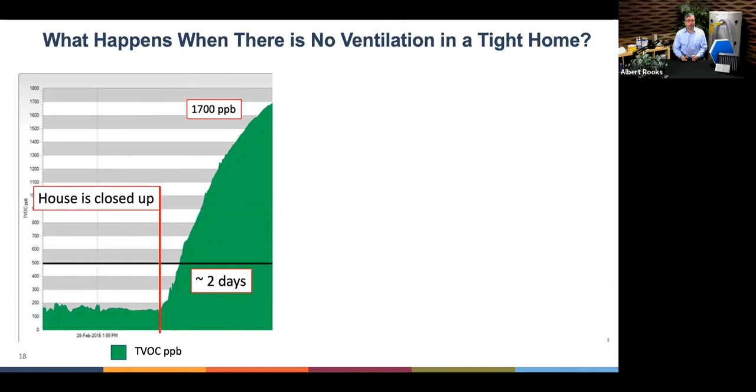When the ventilation system is turned back on, you can see the VOC level immediately drops to well below the WHO recommendations, and remained in a very, very healthy range. That healthy range is determined by the volume of the home and the airflow that we put through it, which we'll talk about a little bit later.

And you can kind of see in this graph, if we did slow that ventilation rate down, we could expect that VOC number to rise back up, right? So this is a way we're directly affecting the air quality inside the home, by the flow rate, especially in a very tight home.

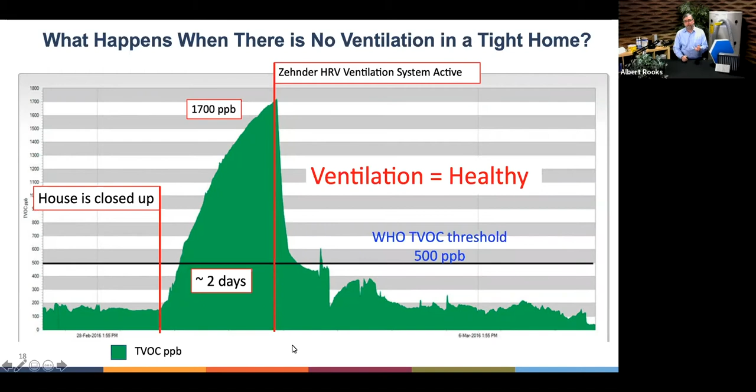So the message here is even when it's built with the most care in material selection, ventilation and a working ventilation system really matters in this case.

Thanks. Okay, good. Catching up with myself there.

So this is really why we like continuous ventilation with distribution. It solves all the problems associated with VOCs and pollutants and gives us the best shot at creating a healthy living space in all conditions for all health statuses, including the young, the aging, and the very sensitive.

Balanced ventilation uses a supply fan and an exhaust fan to flow fresh air across the whole building in one continuous flow. Bedrooms and living rooms receive constant airflow of fresh air. Baths, laundry, mud rooms, kitchens are constantly flowing stale air out of the building.

With steady supply flow flowing in, the air washes from supply points across the transitional zones, like hallways and family rooms, and is pulled into the exhaust rooms and out of the building by the exhaust fan and the negative pressure it creates. The two fans are balanced and constantly running.

The amount of steady airflow will keep the home's relative humidity in the optimal zone. It'll dilute the buildup of VOCs and other contaminants and provide lots and lots of fresh air. It works best with today's newer, tighter homes and can be filtered to manage both normal and extreme conditions, due to smoke that we find in a changing climate.

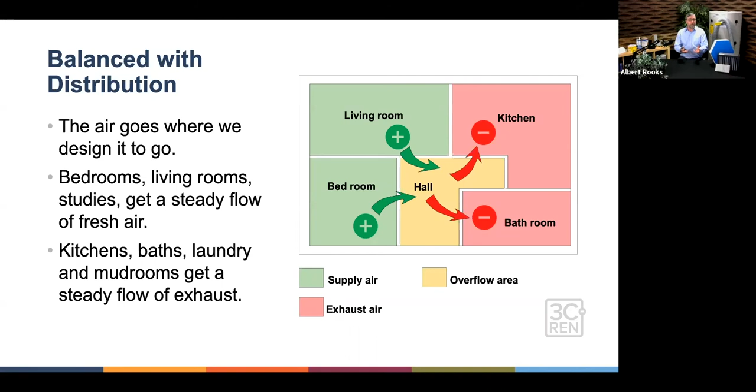How much ventilation do I need? The most basic calculations to provide sufficient airflow for occupants are in this chart. This is a code level chart. It meets safe minimum flow that assumes occupancy based on floor area and bedrooms. This really just serves the code minimum.

There's a lot more that we can do with airflow calculations to improve conditions, as we'll see later in the ventilation for passive house workshop.

In this example, 60 CFM continuous flow works for a 2,400 square foot, 3-bedroom home because you can reasonably expect that home to be occupied by 4 people, with a minimum required supply rate of 15 CFM per person times 4 people equals 60 CFM. So we've got a steady supply flow calculation there.

If the home had 2 baths, the 60 CFM is higher than what we would be required to provide with 2 baths, which is 20 CFM continuous flow per bath, which would equal 40. So we're above that threshold.

If we increase that home to 3 baths, 20 times 3 would bring us back up to the 60 CFM, matching our supply flow. So we're always in a state of balance, but we're choosing really what drives it.

And in some homes, as we get into deeper airflow calculations, maybe in a passive house workshop, we'll find that some homes will be driven by occupancy, 15 CFM per person, or a chart like this, which is really a supply flow calculation.

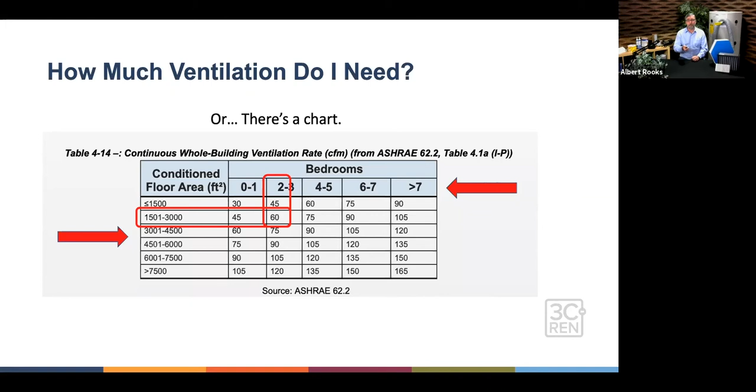Now let's consider the energy impact of continuous ventilation. Continuous ventilation without recovery is like a big hole in the building envelope with a fan taking the conditioned energy we've created and blowing it outside. On a cold day, we add BTUs into the home and then blow those BTUs out continuously with exhaust airflow, while bringing in the same amount of unconditioned fresh air that needs to be heated back up to room temperature.

Once heated, we repeat that cycle, blowing the conditioned air back out of the building. To get an idea of the energy impact, we'll look at a home with a typical envelope of 2x6 walls with R21 insulation, R38 roof, reasonable windows, a HERS insulation inspection with upgraded insulation, and 22 kilowatts of PV on the roof. With code minimum exhaust ventilation, despite all those good attributes, this home was still 2.2 points short of Title 24 compliance at the time we did this calculation.

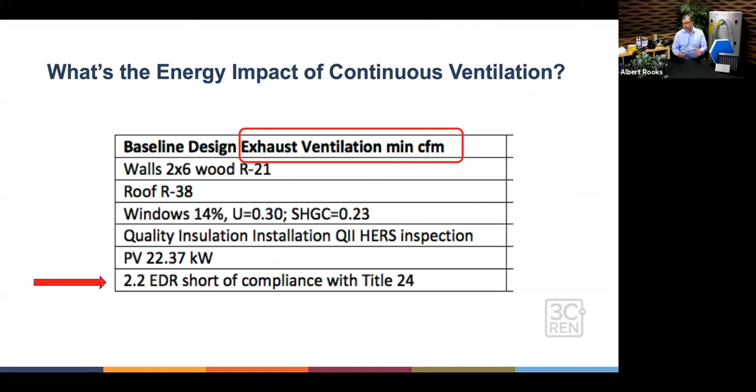This is really down to the ventilation losses of pushing out the conditioned air created in the home. If we fix that problem, the home would be back in certification range. The energy losses through ventilation without recovery are really that big. So what we need to do is recover the heat we're pushing out through the ventilation system. This is where our HRV or ERV comes in.

Recovery ventilators, as we step back and look at them, are an appliance we put in the building, but they're literally part of the building edge or the thermal envelope. Just like the walls, roof, and windows, they provide environmental separation and mitigate heat loss or heat gain. So like most envelope components, the better they are, the better they'll perform. Let's take a look at how they work.

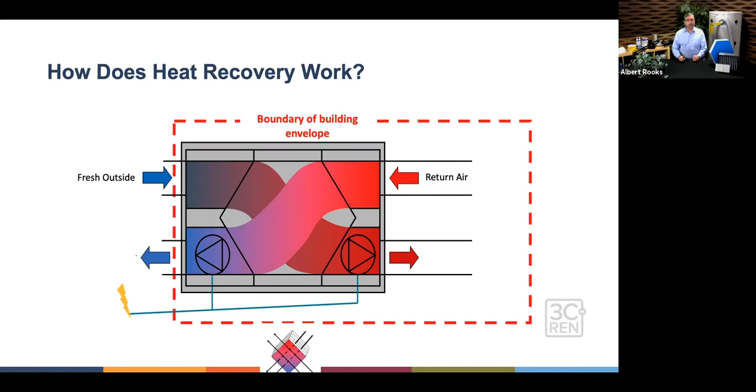Fresh air comes in from outdoors with no heat in a winter heating condition. At the same time, a matching flow of return air comes back from the kitchens and baths carrying heat we've created in the home. The two streams meet in the middle of the device at the heat recovery core, or energy recovery core. As the two systems meet, the return airflow enters this core and drops its heat.

After dropping its heat, the return air heads out of the building through the exhaust. At the same time, the fresh air coming in from outside, which has no heat, enters the core, sees the heat the return air dropped, and picks it up, because nature is always seeking to balance itself. A flow with no energy meets one with energy present, and with lots of surface area in the core, the energy starts moving to the side with no energy. That energy is picked up and carried into the home through the supply air duct.

So the better we can manage that transaction, the more energy we retain inside the home. The return air drops its heat at the core, and this works the same way in a winter condition as it would in a summer condition.

In a summer condition, it's hot outside, and we're hoping to keep the home cool at a certain set point, whether we're applying air conditioning or not—it doesn't really matter, you've got two different conditions. Warm air coming in from outside is countered by the cooler flow coming back from the kitchens and baths. That temperature differential meets in the core, and nature seeks to balance itself: the high energy on the flow coming in from outdoors drops at the core, and the stream without energy picks it up and sends it back outside. So the heat on the outside of the building in a cooling climate comes in, gets dropped, and then gets pulled back out.

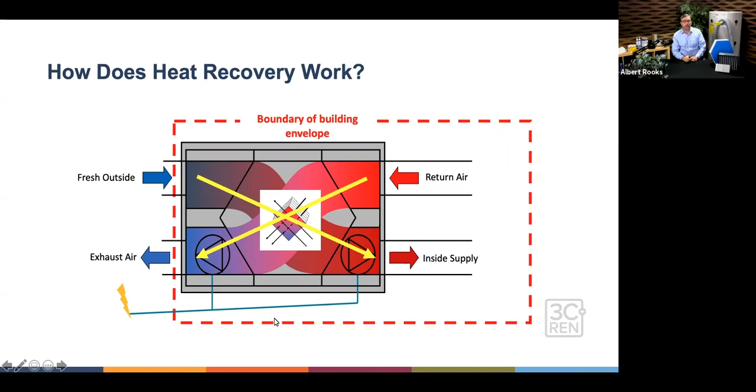So as we work through this... okay, they've calmed down. Thanks. Let's take a closer look at really kind of how this works.

The recovery core, also known as the air-to-air heat exchanger, is where the two air streams, fresh air intake and leaving exhaust air, pass by each other with a large amount of surface area and in contact. So large surface area, airflow is in contact, but they never mix. One stream goes one direction in one compartment, the other stream's going in another direction in another compartment.

This is what one looks like. So this is a flow of air coming in, and all these plates are separated from this flow of air kind of coming back out. So it's similar in shape: flow, outward flow, flow, outward flow. The two streams never touch, but they have this large surface area to kind of be in proximity.

And as they're in proximity, the side that has energy drops that energy to the side that doesn't have energy. Simply how it works. So as that transaction happens, either in a heating climate or a cooling climate, that process continues.

In an ERV, the humidity moves in the same principle. So in homes that have a low relative humidity and we want to conserve whatever moisture that we're creating, which we're going to take a look at in a whole chapter, there's another style core that will do that same transfer. It'll transfer the heat energy as well as the relative humidity, moisture, whatever we want to call it - or we'll call it enthalpy - and it'll bring it across the core and send it back.

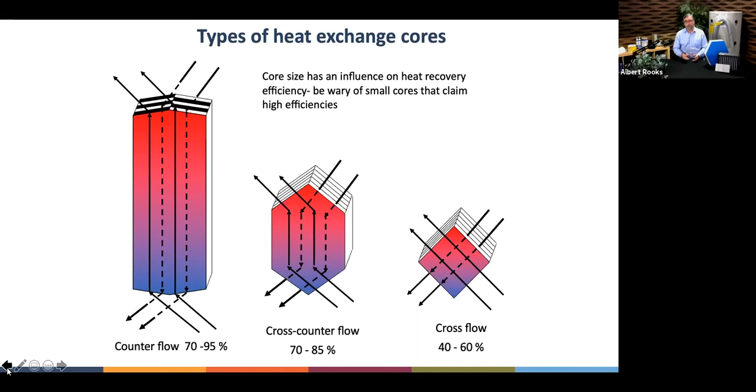As we change our focus, then we start looking at these kind of higher effective rates, 70 to 85 and even up to 95%. And this could be in a single family home or a full on commercial building, residential apartment building, schools - all these applications that use ventilation.

So let's take a look at a home that's got a relatively good HRV in it and really kind of how that works. So this is a brand new home built in 2014. It's in the Pacific Northwest, Vancouver, Washington. That's a mild climate. This data was collected by Portland State University through some research projects to kind of gather information on high performance buildings.

So this is in April when the home is occupied, but they have not turned on the heating system yet. So this is simply all down to solar gains, occupant using energy, people, refrigerators, things like that, and an HRV in this case.

with roughly 90% recovery. The home, the ventilation rate for the home is 0.3 air changes per hour, which equates to the volume of the air inside the home turned over once every 3 hours, all new, right? So every 3 hours, we've blown out the entire volume of air inside.

And really, what we're trying to do is retain all the energy that we've created inside and that we're generating inside. So we're going to take a walk through the data now, and I'm going to kind of tell you about what these lines are on the graph.

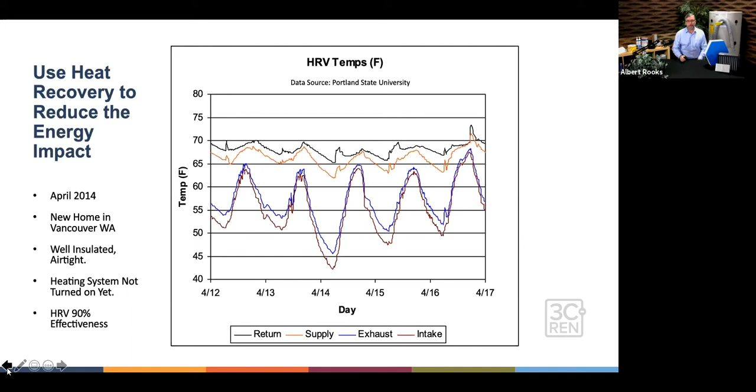We are going to get to questions at the end of the chapter, and we're really close, a couple of slides away, and then we'll spend a few minutes kind of talking it through.

So same example that we looked at before, in terms of this Title 24 calculation. On the left-hand side, we're back to that same house, and it's exhaust only, no recovery, right? Just a hole in the wall. We shove the energy out of the building with a fan. We've got our usual 2x6, R21, R38 roof, yada yada yada.

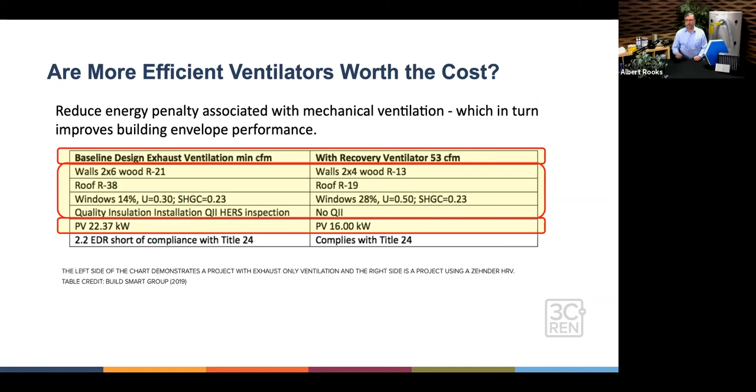Compare that to the home on the right. Now it's 53 CFM, so it's not a really big home, right? It's going to be less than 2,400 square feet. And now we downgrade the building envelope. Instead of 2x6 at R21, it's going to be 2x4 with R13. The roof goes from R38 down to R19. Windows don't really work quite as well, a little lower performing. There's no HERS inspection on the install. And the PV goes from 22 kilowatts down to 16 kilowatts.

So the whole thing is down. But the thing is, because we're employing heat recovery on the ventilation losses, big old hole in the wall, that energy, using that with this lesser performing building envelope, would put us into Title 24 compliance. Not at all saying that's what we should do, use HRV so we could use 2x4s and R13. Not the message here at all.

It's an illustration. This is a calculation that we did with a consultant in California as the new Title 24 is coming out. We looked at single family homes in many different configurations and apartment buildings, and tried to understand what the ventilation losses are, and as you increase the scale of effective recovery, what that does to the building envelope, and what other alternatives it can help you with. If anybody is interested in that, reach out to us. There's a whole blog on our Small Planet Supply blog explaining it.

It's a moving target because California Energy Commission is trying to keep the game going in the right direction, and we don't want heat recovery to turn into an argument for really bad building envelopes at all. However, the illustration here is ventilation losses are significant.

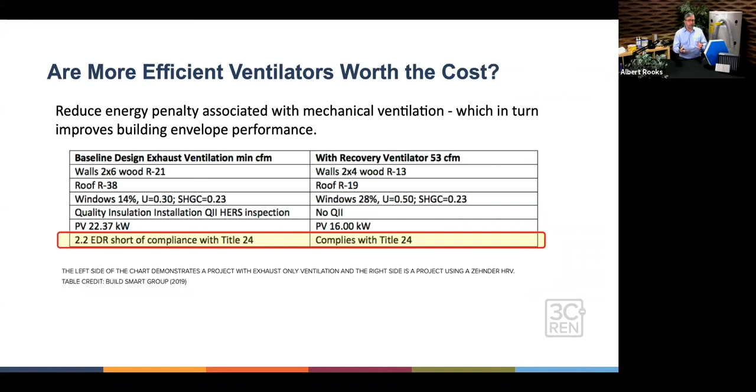They're big. And when we think about it, if we go back to that same building envelope, 2x6, R21, R38, 22 kilowatts of PV, all that good stuff, and then we plug in heat recovery, now we're going to find that we're a lot closer to creating a lower energy building, achieving net zero status with smaller amounts of PV. And if we do have problems with the building in terms of siting, earth connection, and maybe building envelope imperfections that are really hard to work around, employing higher effective heat recovery is one way to bring that energy balance back in a useful way.

So there's one thing about the energy impact of recovery ventilation on a building.

Energy is one thing and cost is one thing, but we're building these things for people. So let's take a look at really what the comfort impact of using various heat recovery devices is, and how we would experience them as people living in the home. So here's our example home.

We'll place it in my climate, a mild coastal climate, 70 degree set point inside, 40 degree outside air temperature. At 60% effective recovery, we would get an airflow coming out of the supply, going into the bedrooms and public spaces, of 58 degrees Fahrenheit. That's kind of cold. It gets a little better as we increase to 70%, so we get a better HRV. That's kind of the way we would fix this. It bumps up to 61 degrees.

And it's a simple calculation. We've got a 70 degree set point, 40 degrees coming in, there's a delta T there. 70 minus 40 is 30. And then we multiply that delta T times the effective rate, and that gives us a calculation of what that supply flow temperature is. So there's not a lot mysterious going on here.

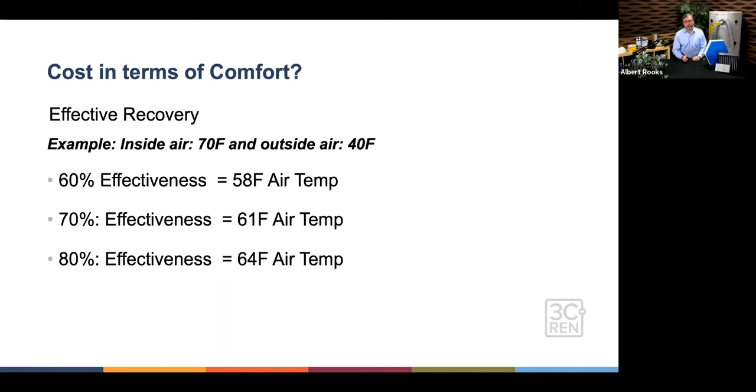If we increase it up to 80%, now we get a supply flow of 64 degrees. So 64 degrees at 15 CFM per person. Maybe a master bedroom would get 20, 24 CFM, something like that. And if you got 24 CFM of 58 degree air coming in near a bedroom, that's not going to feel so hot when it's 40 outside.

It's going to feel worse when it's 30 degrees Fahrenheit outside, but if it's flowing at 64, it's not so bad, right? Because humans are kind of funny, it's not about what we feel on it. Our bodies become uncomfortable in heat loss situations because of how much heat our body is losing, which affects how our blood vessels work, whether things tighten up and we start conserving energy at our core. That's really what's going on with heat loss. So the difference between 64 and 58 is like a big reaction in your body. So these things are important.

And if we step up to 90%, here's a really good situation, because if it's 70 and we've got a small flow of 67 degree air, we're never going to feel it. That's going to come in and mix, and it's not going to be a cold spot. It could be right near the sleeping area, which means you've got lots of fresh air coming in, so you don't have to worry about high CO2 spikes as you close the bedroom door. It's a really good situation. So when we consider the long-term satisfaction of the occupant using this ventilation system, as they get more efficient, there's a real benefit for the people that have occupied the space.

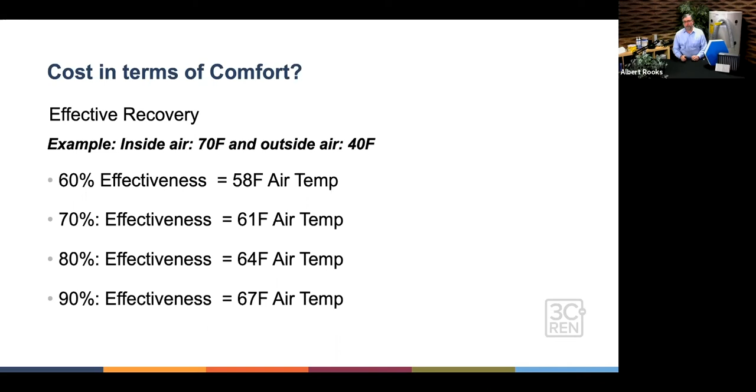Where's the rest of the heat coming from? I know that building, I've been in that building. It's a very good building, 2x6 construction, believe it's batt insulation, really good air tightness. Hit that legendary 0.6 ACH50, kind of the passive house number. And then I think it's got an inch, maybe an inch and a half of polyiso around the edge of the building, some really good windows, and it's got a lot of glazing. In April, low winter sun coming in, dumping some warmth in that building, because you can go back and remember that slide, it's like the outdoor air temperature was cycling pretty heavy. So in the daytime we got a lot of heat. Building kind of holds its heat, and the ventilation doesn't cause it to lose heat.

And the rest of the heat contribution is really refrigerators - depending on the refrigerator you buy, they're basically removing the heat from inside your refrigerator box and placing it outside, out the back through that grill. Every time you run a washing machine, do a shower, just your body walking around and doing things, that all makes heat inside the home. And as you get into these highly performing buildings, those little heat inputs become more important and a direct part of the calculation in the load balance.

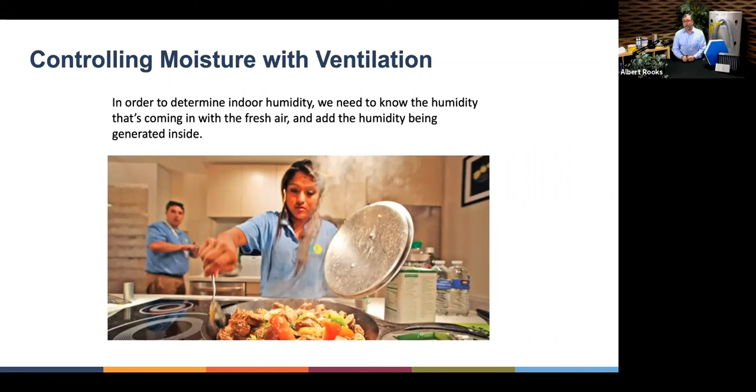It's the same in climates where outdoor humidity is really high. High outdoor humidity can be experienced in many places. For an extreme example, just think of Atlanta, Georgia—high heat, high humidity. We can manage the indoor humidity with a tight envelope and the way that we deliver the ventilation.

So we're going to walk through a couple of slides and then start capturing all of this together. We make moisture in homes—we constantly produce moisture just by living in them. We can count on a continuous contribution of moisture and generally predict how much that will be. As we move air in and out of the home, we can increase or decrease the home's relative humidity by how much air we move through it.

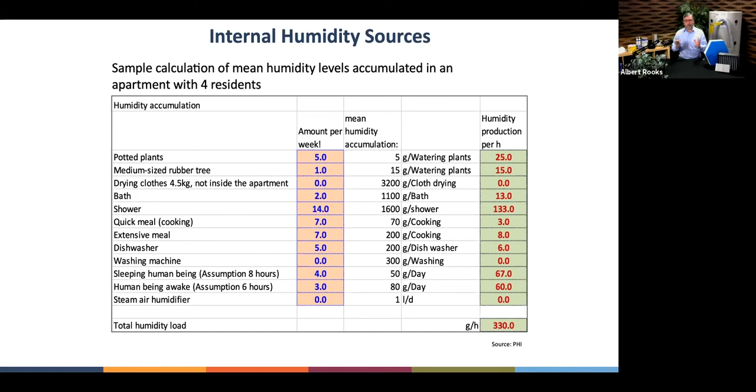So the rate of airflow and the humidity of the air you flow into the home really matters, and it will affect the home's relative humidity level, therefore its comfort and the occupant's health. If things get too dry, it's unhealthy. If things get too humid, it's also unhealthy. The first workshop we did had a chart showing the two guardrails for that.

Let's see just how airflow really manages this. We'll start with airflow and then start looking at enthalpy recovery. So just to get the basics down, here's a home—consider it a box right here in front of us. We've got two fans: Fan A is pushing air in, Fan B is pulling air out.

So we'll say the outdoor air right now is high humidity—it's cold in the heating season right now. This example shows 23 degrees outside with 90% relative humidity. It's a strange situation to be in, but it is a calculus, it does exist. On the inside, we have a contribution through just living, breathing, and doing all the things we do as humans of 330 grams per hour of moisture contribution. That's what we create on average on a steady basis. Our inside set point is 68 degrees Fahrenheit, and in that condition we can expect 24% relative humidity.

The reason that relative humidity is coming down to 24%, even though we've got high humidity outside, is there's two driving factors: we're only making 330 grams per hour of moisture, and we're pushing a lot of air through it. And the funny thing is, 23-degree air outside at 90% relative humidity—it's called relative humidity because it's relative to the temperature.

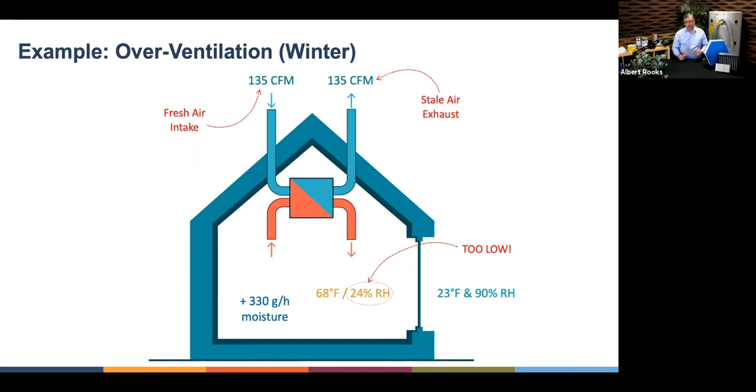But as the air expands, the relative amount of water to the volume of air starts dropping. So 90% comes in, and at 68 degrees it'll turn into like 50% or something like that. And if you've got 50% relative humidity coming in and clipping at 135 CFM every minute, and you're only making 330 grams, then what you're making is just going to get blown out of the building. So the relative humidity is going to drop.

We advance it, we change something. One thing we can change is we can't change the environmental concerns - we keep our set point at 68, but we lower the fan speed. So we go from 135 CFM airflow and ramp it down to 44 CFM, which means that we're less than a 2,400 square foot home. Never mind what our guardrail limits are, just understanding how this transaction works.

We lower down to 44 CFM, and you can see that the relative humidity pops up to 41%. 41% is comfortable, 24% is not comfortable. We have these conversations all the time in very well-defined buildings in California, in the north in Canada, kind of all over the place. 41% is great, 24% is not great. This is a factor that's really easy to change - we can just change how much the airflow is. And as long as it meets the other criteria we're trying to hit, then that's all good.

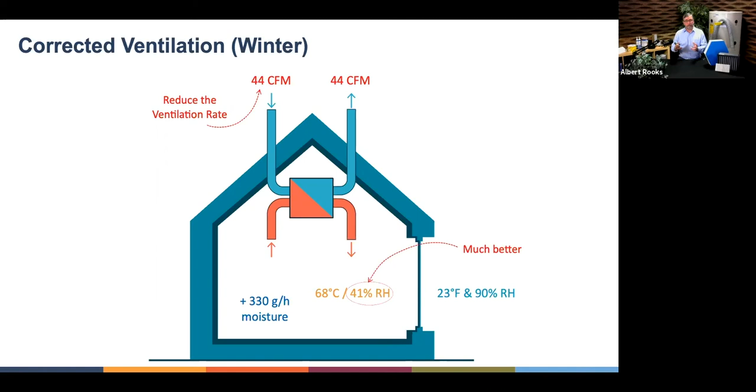But there's one other thing we can adjust based on conditions that we experience and design for - we can use an enthalpy recovery core. Rather than an HRV, we'll use an ERV. So here's kind of a diagram of how an ERV works. There's one more slide that steps a little deeper into the plate. This is a two-step explanation.

So the red line is the extract air. In a winter condition, we're generally trying to increase the amount of moisture - kind of like the Tahoe region, maybe not the coastal region, but think about the Tahoe region right now, where it's dry outside. We're not making a lot of moisture inside. We need a flow of air, and so we're tending to dry the home out just with simple airflow.

But if we pop another recovery device in front of it, an enthalpy core, it actually recovers the moisture at the same time. So that red line, the moisture comes into the core, starts transferring over to the other flow, just like the heat transfers over, and then returns back in. And again, just like heat, the amount of enthalpy or moisture we can recover depends on the quality of the core. They come in all shapes and sizes - some are really pretty crappy, and some are really quite good. So if we want to really recover the humidity and the heat recovery, this combined with changing the airflow will change the dynamics of the relative humidity inside the home.

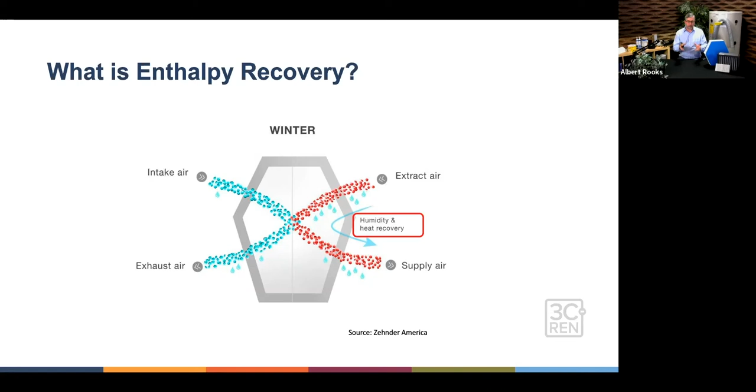Just like an HRV, an ERV has two streams of air moving in opposite directions. The plate separating the airflows will also absorb moisture in this case - in an HRV, they only absorb heat. The flow that has moisture coming back in, when it encounters the membrane with the flow that doesn't have moisture coming in, just like heat, the moisture will get dropped and nature will seek to balance itself. The moisture will essentially wick over to the other side where the airflow has less moisture, and that moisture will get picked up in its flow back inside the building. The amount of moisture transfer depends on how good the recovery core is.

These days the cores can get pretty good, with as much as 90% enthalpy recovery. This is a key way that we would manage the home's relative humidity in really dry climates or really humid climates. It works kind of everywhere in between, but as we get to the extreme outer edges, it really matters a great deal.

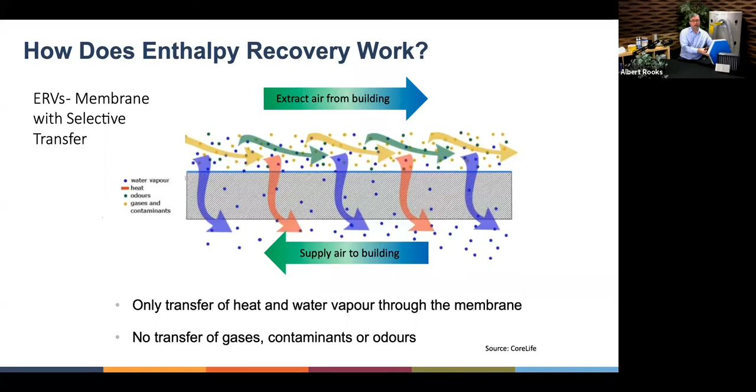So that means all of that energy we're creating, most of it's staying inside of the building. Now let's switch to a summer scenario, and let's switch to hot and humid and an ERV core. So counterflow ERV core - this is quite a good core, 90% recovery.

Same scenario, right? 104 coming in from outside, and it's humid. So in my understanding, unless we've got a really, really good building, the only way we're having a 68-degree coming back from kitchens and baths on when it's 104 degrees outside is we're either underground or we've got cooling going on. So we're cooling the building. And as we're cooling it, we tend to dry out the building because as we drop the temperature, the relative humidity drops. We can do that really well, or we can do it in a clumsy way with a clunky AC device that just starts up, cools, shuts off, warms up again, cools, shuts off. Either way, doesn't matter - 104 coming in, 68 coming back in from kitchens and bath, and we put a lot of energy to cool that down.

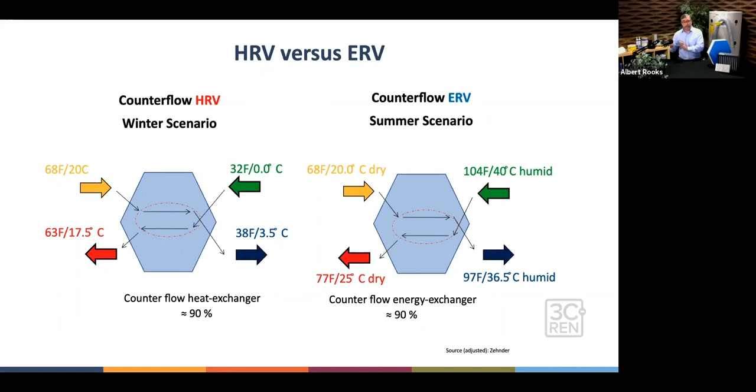So that's kind of the example of HRV to ERV in a hot, humid climate and a dry climate. ERVs are really a useful tool when it's really dry or when it's really humid, and in a mixed situation.

If I was building something on the Central Coast in California, or anywhere on the coast in California, we get into these small microclimates and some decisions that are hard to make, but the boundaries are so similar it's not like we're going to make a mistake and do something wrong. It's just not understanding exactly what's perfect.

There's a map for this, and broadly we can go by the map and it'll get us there. If we actually want to really detail how the conditions of the house are going to be for the occupants, I wouldn't be using the map. But the map's a fine place to start.

The map basically says it's blue. Blue is cold and dry. We need an ERV because generally we're going to be fighting to keep the relative humidity up in a home in a cold climate. Anything below green, down through - right now Texas is more blue than it is orange today, but still going to be kind of the same case in those southern parts of the continent, where they're generally more hot and more humid.

Certainly in the orange areas, that's an ERV again. The green area is really right about an HRV, HRV or ERV, because it's kind of that close decision point, and you kind of dig deeper into it. The coastal green is also HRV or ERV, and here's kind of some of the decision points. This is where you want to work with a good partner that understands the situation a little better.

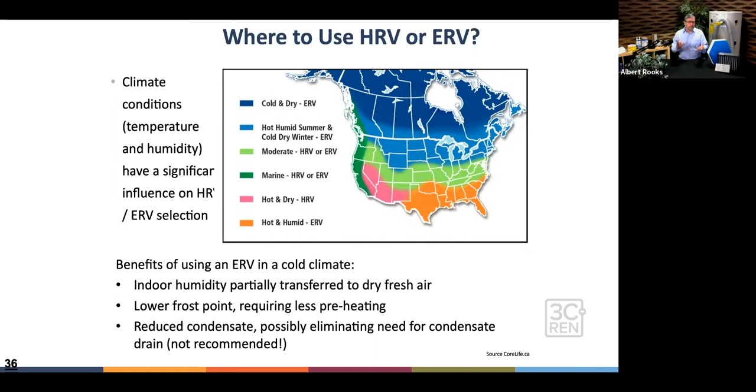Those are kind of the decision points that can be made, and it's just, do you have the right conversation going on to make those?

So now it's time for questions, and it looks like Dee popped a good one up there: how does the core add moisture in that example of two people in 3,200 square foot in dry winter conditions?

Thank you. The core does not add moisture, it only conserves the moisture that's already in there. So if I try to use my hands to explain this - we've got a box right here, the edges of the box, and there's very little moisture outside, and we're flowing that moisture inside. We've got two people inside of our box, and they're making a little bit of moisture, not a lot. So really, what that enthalpy core is going to do is prevent that moisture from leaving. It's going to hit that enthalpy wall and circle back and stay inside the home. So what it can do is - it can't generate anything because there's no moving parts and no hose going in there. It's just going to conserve what's already created.

And if it's too dry in homes like this, then you need to add humidification. So you would add a humidity device to just bring up the relative humidity and set it on a signal that it kind of manages itself.

So Peter, you may have missed this, but is the incoming air filtered in some way? I'm going to say yes, and thanks. This is a great question. There's a slide later, but we're going to do this right now also.

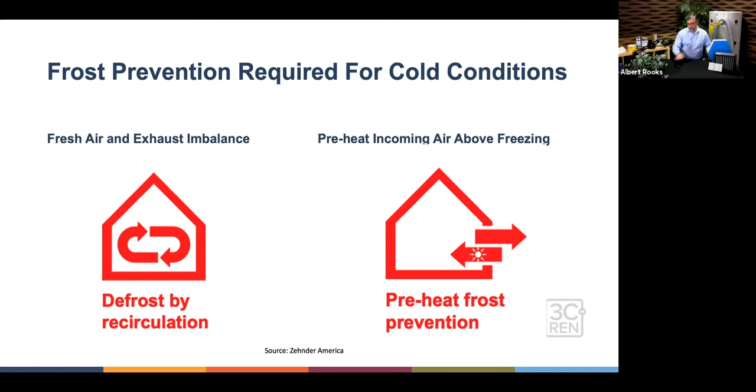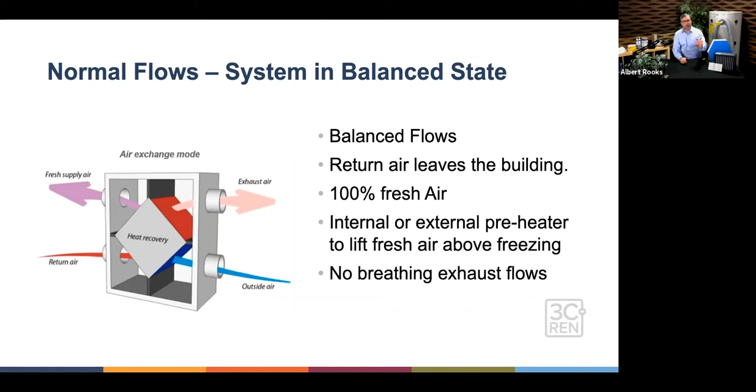So all we need to do is provide a small amount of lift. Here's a slide that talks about how return air leaves the building 100% fresh with normal flows, system in a balanced state. When it gets cold, we get recirculation imbalance, where we're rechanneling some of that return air back into our supply air.

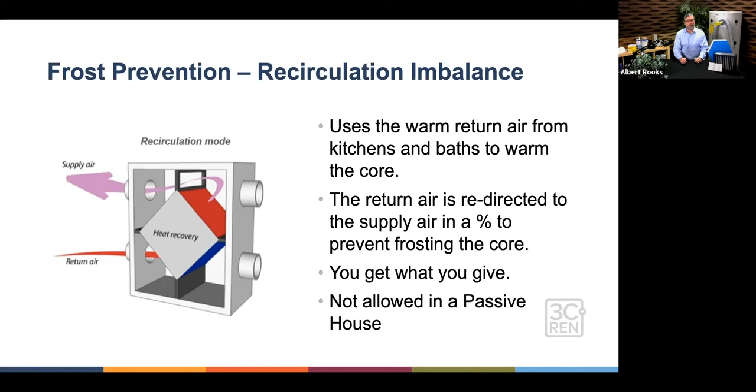And that's how it normally works. If we don't want to do that, if we want to lift above freezing, there are a number of ways we can do this. So here's the ways, quickly and simply.

So this is an electric preheater. In cold climates, mountainous conditions, or anywhere it's cold, even in high desert applications, this would be parked between the building envelope and the HRV or ERV. We've got a little electric preheater. They come in all shapes and sizes. Some are smarter than others, and they'll look at the incoming flow temperature, maybe with a 2 kilowatt heating element, and they'll start flashing energy to try to lift the incoming airstream to something above freezing.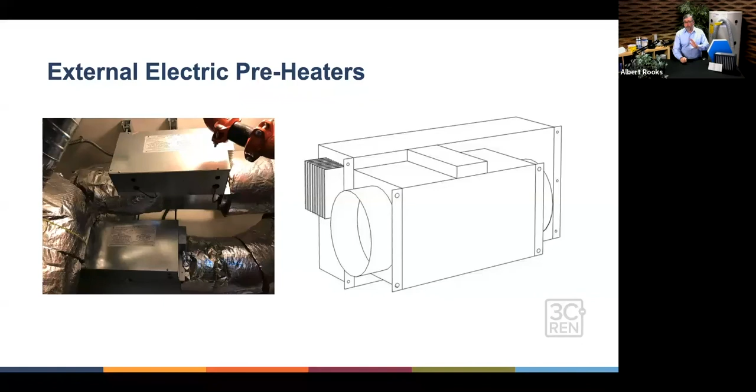The cheaper ones will tend to overshoot, so you could wind up taking 28 degree air and lifting it to 40 degrees because you've got an oversized heater there. And that's okay, everything's still working, the ERV is going to work all just fine. It's just that you've got a little bit of energy that you're wasting, because essentially that energy is going to wind up getting bounced outside. It's not going to be heating energy that shows up inside, because we've got a core here that redirects things. So it's nice when they work in the range they're supposed to work in.

Here's one that's really, really smart, that works on systems I understand and work with, and is suitable for these low energy buildings where we're really living on a thin energy margin. So that little red circle that drifted up there, the top red line is the after-preheater temperature, and the lower line is the outdoor air temperature bouncing around.

So the goal, and this is in Celsius, the red line's at 0, right? That's freezing, 32 degrees Fahrenheit. Negative 5 is probably something like 28 or 26 degrees Fahrenheit. And essentially what that's going to do is look at the conditions, the airflow, and the temperature of the incoming air, and do a calculation to flash just enough electric energy onto that preheating element to lift it to zero as it flows through.

And it really does work. I've got equipment where I can see how well it's working, and it tracks right around there. So on a project, if you're living on a tight energy balance, this is a super good way to manage it, because you always have fresh air, no mixing of streams, and you're just using the energy that you need to maintain it.

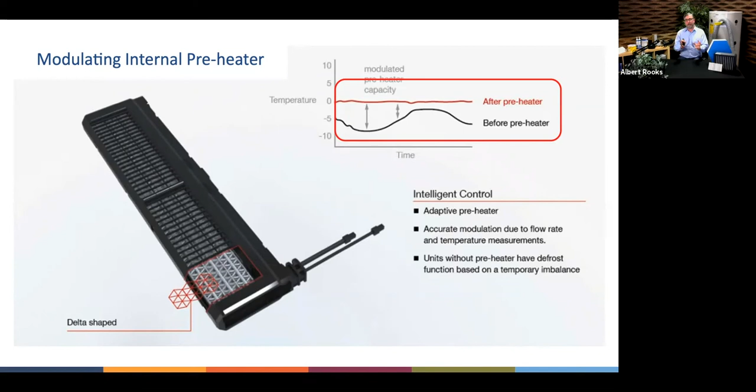If you want to take it even farther—one more slide to talk about the energy penalty. If we look at exhaust-only energy and some levels of preheater: if we heat up a home with a forced air system or a mini split, we spend a lot of energy heating that up. We lift it all the way up to 70 or so, and that represents some level of energy, 4,000 BTU an hour, something like that.

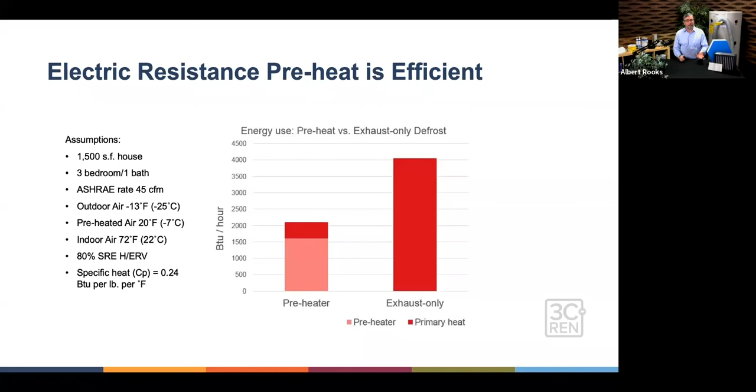And if we're just blowing that energy out at 45 CFM continuous, then those BTUs are leaving, they're never coming back. We've just expended them in order to provide ventilation for the building. If we start putting a preheater in line, and it uses electric energy and it's not perfect, the sum of energy it uses in the preheating function is still a lot less than what it would use without a preheating function. So we wind up saving a substantial amount of energy.

The best way to accomplish this is super simple. There's a little bit of cost to it, but essentially it's a ground loop.

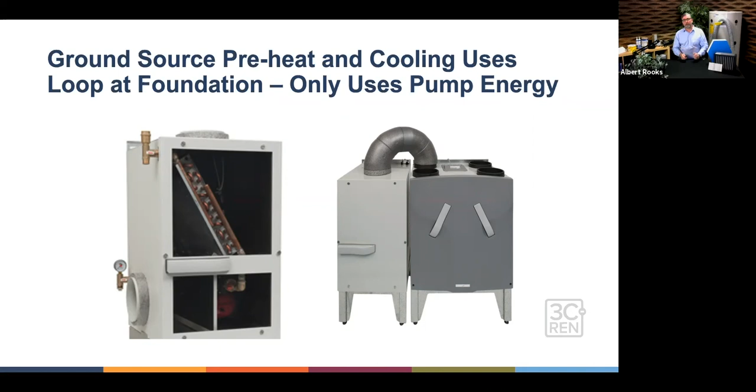So you just run a ground loop of 300 feet around the foundation of the building, below the frost line, somewhere it's going to hopefully be 40 to 50 degrees. Run a brine loop through that around there, and run that brine loop up to a box that sits right in front of the HRV. So we bring the energy up from the soil, put it in front of the airflow coming into the building, and away we go.

Okay, no questions right now. We're getting kind of short on time, so I'm going to jump into the last chapter, which is how to set up an ERV or HRV into a building.

There are a few things you want to do, these are really important subjects. Typically place the unit near the building edge so you don't have to run insulated ducts carrying very cold air. When it's cold coming in, it's going to be cold going back out. So the closer you get to the edge of the wall, the simpler.

It does have filters, and filters want to be changed, so locate it in a space where the homeowner can get to it and regularly change the filters. A crawl space can be a problem for that, and an attic can be a problem for that. Good units with filter changes will create really comfortable homes, so it's worth giving it a good spot.

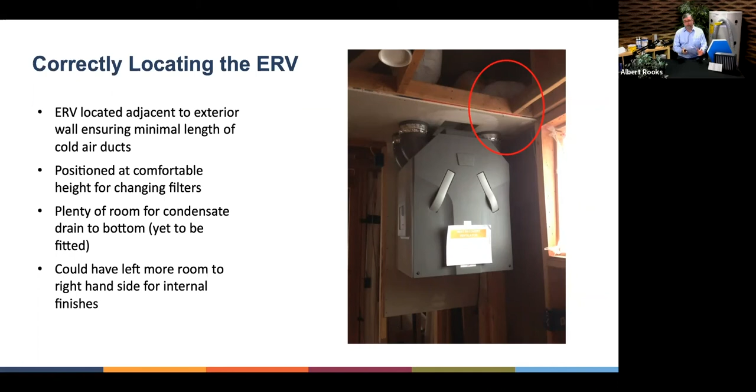Ducting coming in from the outside of the building absolutely needs insulation on it, really in all conditions, for two reasons. One, we've got cold air coming in that can transfer into the home through the ducting, but it'll also create condensation. If we have cold air coming into a space at 70 degrees with moisture on it, that moisture is going to hit that cold surface and water is going to build up. So you want insulation to protect from condensation.

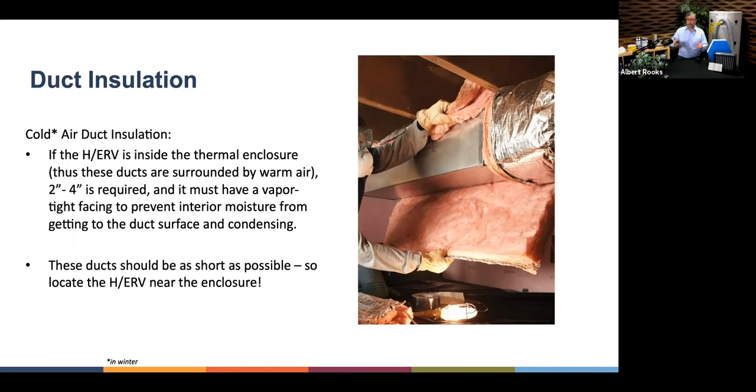And as you insulate, you want to make sure you have a vapor barrier around the insulation so airflow can't get to it. When insulation gets wet and soggy, it really creates a mess.

HRVs and ERVs, but HRVs absolutely use a condensation drain. Cold air coming in has some moisture, and hot moisture coming back from showers and so forth is going to hit that. In an HRV, that transaction pushes all the water out of the airflow, and that water doesn't get redirected back into the house. It turns into liquid water and falls out the condensation drain.

You'd be surprised how much condensation a really good HRV makes, because at 50 to 60% efficiency it drops some condensation down, and at 90% it drops a lot of condensation down. There are two ways condensation drains work. Some use a ball trap with plumbing that connects off to a drain. The less expensive, more common industry units use two little flexible hoses, creating a loop that acts like a P-trap.

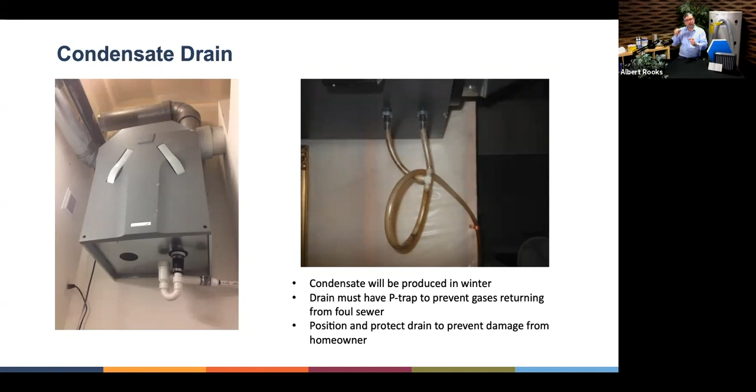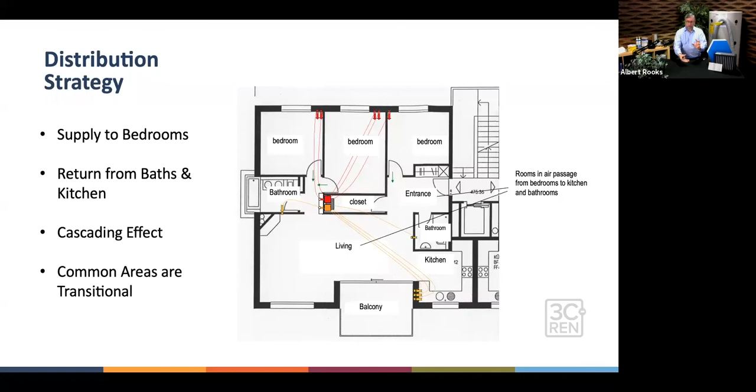It's just going to be a simple transitional pathway where we positively pressurize the bedroom, it transitions through the halls and living room area, and then gets picked up in the negative pressure area and pulled out of the building through the return ducts. So we are essentially employing a cascading design across the whole building, starting in the bedrooms, because as we close the door, we get lots of fresh air coming in. It travels through the undercut of the door at night and leads to the outside of the building.

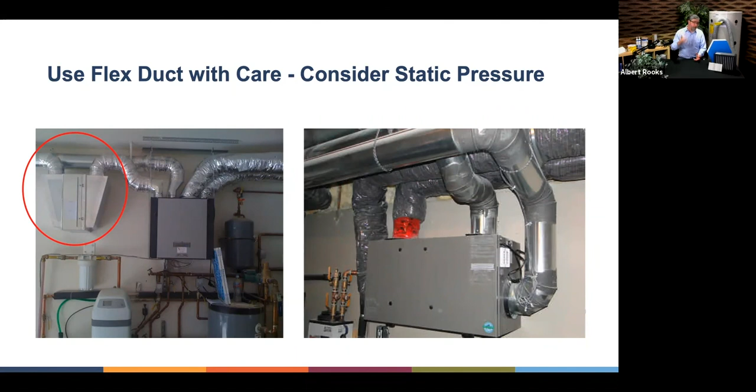As we install ducting, we want to be careful. There's a filter - filter's a great thing. It's on the warm side of the HRV in this case. The filter is going to add static pressure. And when we use flex duct, if that flex duct gets kinked later in construction and we don't inspect it, that creates static pressure also. So the quality of our airflow is going to be dictated by the quality of the installation and anticipating what kind of static we're introducing into the system.

You can transition airflow from one unit to another. I've got certain regions that we work with where there's a big main house and there's always kind of a mother-in-law apartment, a little rental unit or something like that. They'll employ one big HRV and then a 4-inch duct or a 6-inch duct through a fire boundary with a smoke or fire damper, and everybody will run off of that one airflow.

It's great to do that with good equipment because we're never recirculating anyone's exhaust, right? So the exhaust in the rental bathroom is never showing up in the master bedroom supply flow, because the better units don't use recirculation as a way to do frost prevention - it's always 100% fresh air. So what everybody gets in those areas is 100% fresh air, everyone's exhaust always leaves the building.

As you're introducing ducting, there's steel ducting, there's flex ducting, and there's also small diameter ducting like this right behind me. This ducting system is designed around roughly 12 to 15 CFM per tube, and you create a manifold right at the unit - it's called a home run rather than a trunk and branch where we run a big, large diameter steel line down and make branches and come off. Everything is a home run from the unit to the actual supply point or return point. It's nice and clean and simple.

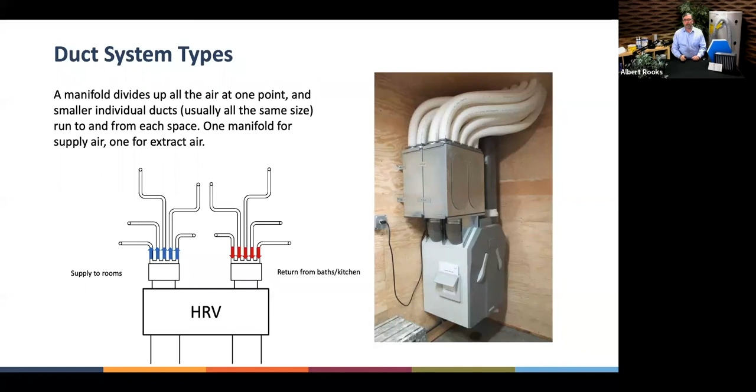It's really easy to balance at the end because getting airflow to move down a central corridor in a trunk and then take a hard 90 and show up at a certain value, another 6 feet with another 90 around the bend, can be kind of tricky. So that's one way to do it. What you don't want to do is make a ductopus.

I actually had to go straighten this one out. This is an apartment building in Seattle. The HRV is down below, and that steel box in the middle is a heating and cooling coil. The idea is that the air comes out of the HRV, passes over that coil, gets lifted or dropped in air temperature, and then distributes out to the apartments that it serves. This device serves about 5 apartments.

They didn't leave enough room. It's really hard to figure out how it's plumbed. You can imagine that, okay, we can design it, we can put all the parts in - it's another matter whether they actually work. We have the ability to get the airflow where it's going. So good planning, good materials, good installation is really important. The people that did this are really good people.

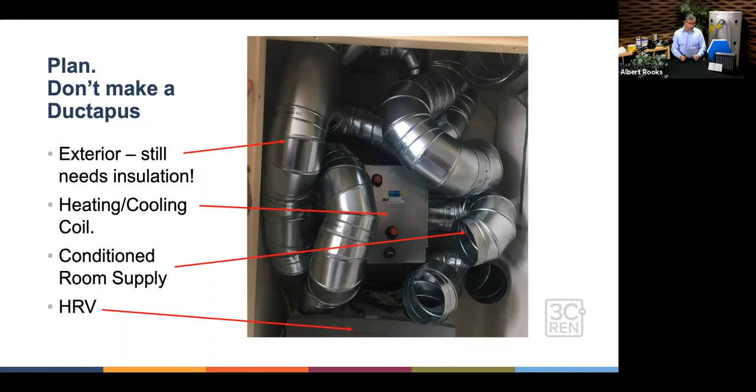They just let the situation get ahead of them. We work with residential buildings and big buildings, office buildings, rental apartment units, condominium high-rise units. It's all the same. You can approach it with single HRVs or ERVs in a single home, in a single apartment, or you can have a big office tower and a really large HRV. Same principle, maybe different delivery method.

On the left-hand side, you can see where we're coming from. And the new term is called DOAS. So this is a system that's got the gray box on the outside that just brings air up, brings a little bit of fresh air in. That's that little blue line. And then it's got a gas heater or an air conditioner or something like that, and it lifts the temperature and sends it back inside the building. In that building, we're just using the air over and over and over. We don't have much fresh air coming in.

The building next to it now uses a very large heat recovery device. It's the same principle in that we're conditioning the energy and we're going to run it through a core before we run the stale air outside and bring fresh air inside. We're going to recover that energy and everyone's going to get lots and lots of fresh air, so we'll be more productive in our work and conserve the amount of energy inside the building.

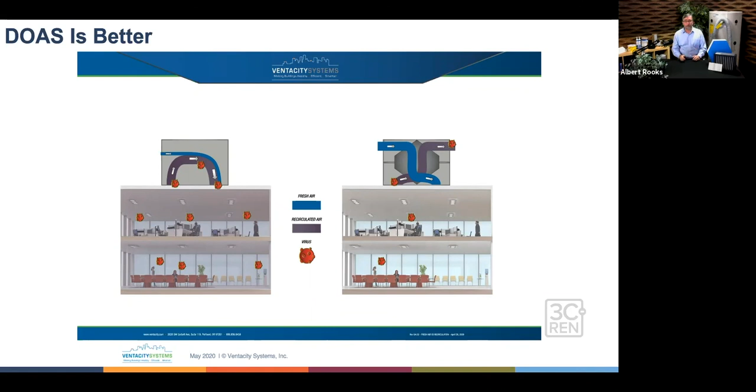Now that we're kind of in a COVID environment, the big concern is that in the building on the left that we built quite a long time ago, we're recirculating the air. So the only way we can deal with the virus is to put in filtration. Putting in filtration and capturing it all and redistributing at the rate that we need to do is a really big challenge. In new projects, the building on the right is going to have a lot of fresh airflow, a lot of exhaust flow, and it won't have the energy penalty that we would typically associate with it. So absolutely kind of the bright picture of the future.

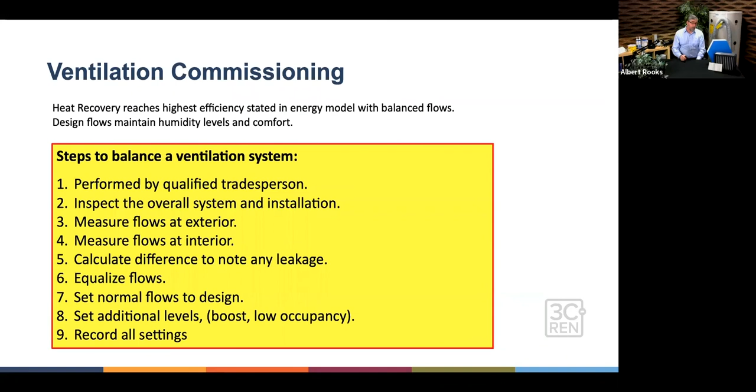Last thing that we're going to do with this is we're going to look at commissioning and balancing. It wants to be done by someone who's used to doing it. It's not terribly simple. All we're going to do is look at the two flows, inside and outside, and make sure the flows are the same and within the range of our design.

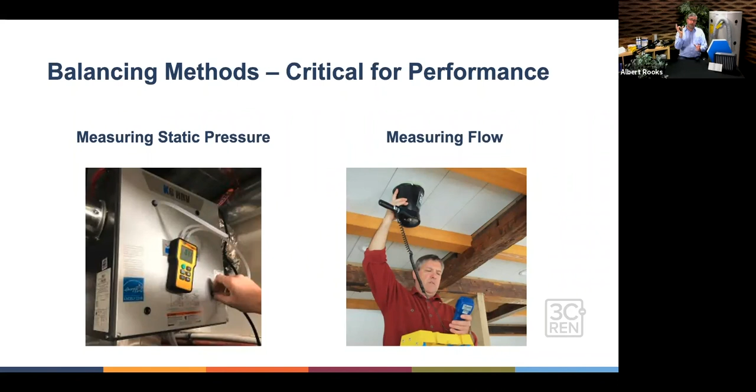In the common basic industry units, they'll use a little device that measures static pressure, and they'll kind of gauge what the airflow across the unit is. In the better projects, and as you get into passive house, you'll actually go to each termination and put an airflow meter on it, and you'll adjust each termination as well as the airflows across the unit themselves. Simple enough to do. Doesn't matter if it's a little building or a big building.

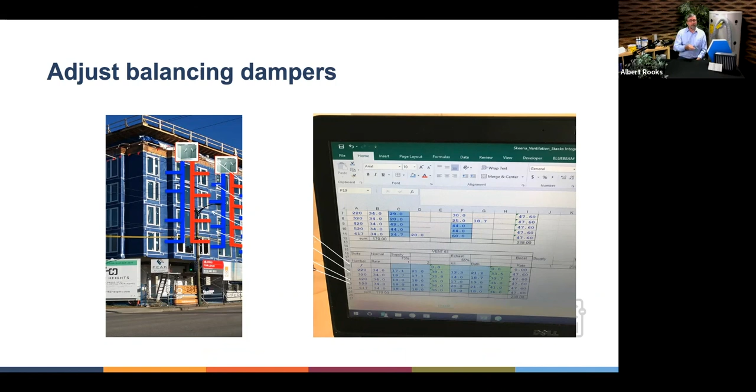That building right there has a series of large HRVs across the top. The blue line represents supply flow to all those apartments on 5 floors, and the other line is kind of the return going back up to the building.

When it comes time to balance those things, we've got 2 ECM fans, and we can really balance them well because it's quite a good piece of equipment that gives us a lot of ability to adjust and set its performance. Without doing anything, you can see that on one side, we've got 181 CFM on supply and 178 on exhaust. We want to get it closer than that, and we can get it closer just by dialing up the exhaust fan or dialing down the supply fan just a few percentage points to get those 2 numbers to meet.

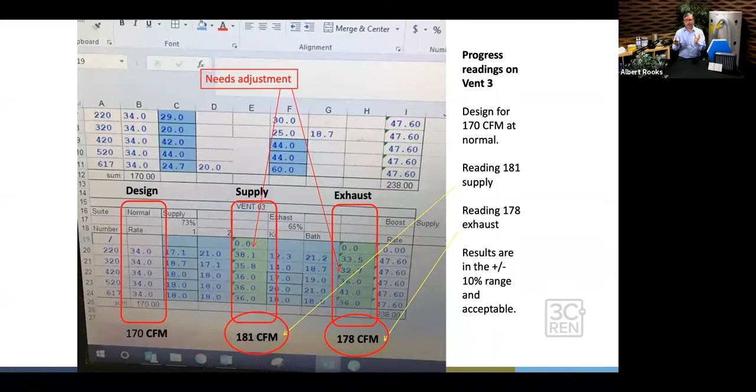We were able to get those to meet, and in these designs, it's quite possible on a large building to set a standard and an expectation of my duct pressure, my static pressure across the whole ventilation system, to be 0.8 inches of water column, or in pascals, whatever number. When it all goes in and we measure it at commissioning and find these relative values, we know there's probably not a lot of duct leakage, and that we're getting the right airflow, which will maintain as long as we keep the filters going. We'll still be in good shape.

So with that, I've gone through all the topics. Here's a question: does the type of ducting impact the HRV or ERV system's efficiency?

So it does, as long as it's within a realm. The ducting introduces pressure, right? It's just like pushing water through a hose — the more wavy we make the hose and push the water around corners, the more pressure builds. So essentially, we want to provide good, clean, straight ducting as much as possible. If we're going to make a bend in steel or flex duct, we don't want sharp bends like that — we want bends that create the smallest amount of static pressure. And when we do that, if we're hitting our designs, everything will work really well.

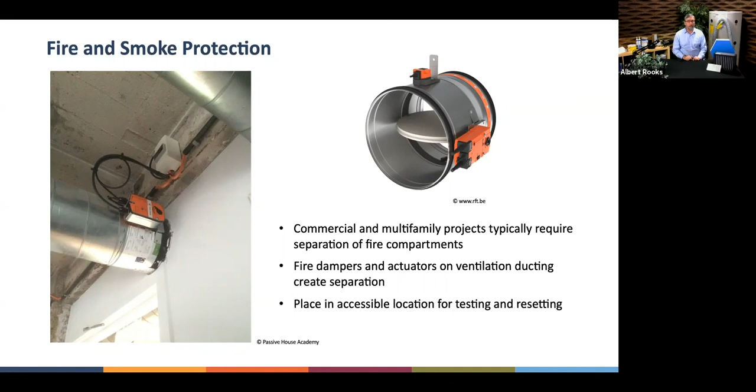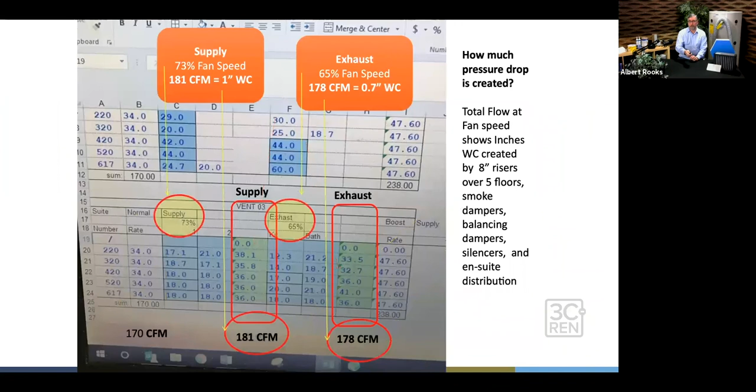Good, so with that, I'm going to get back to the end of our slides. Okay, so we're still kind of at the end here, answering questions. Really right now, I've covered all the topics.

For those who want to talk about passive house ventilation specifically, that's going to be the next workshop, on March 30th. As we get into passive house ventilation - which HRVs, ERVs - we're going to talk about the best performing HRVs and ERVs, what the requirements for distribution are, how it models into an energy model, and what the passive house requirements are, both North American and the PHI German Institute standards.

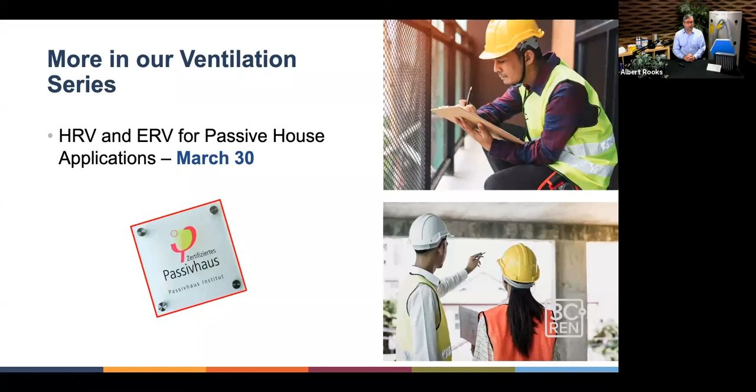With that, I think I'm ready to turn it over to Sean and hand it off. Hopefully this was useful for you, and I appreciate your time, joining, and questions. Thanks.